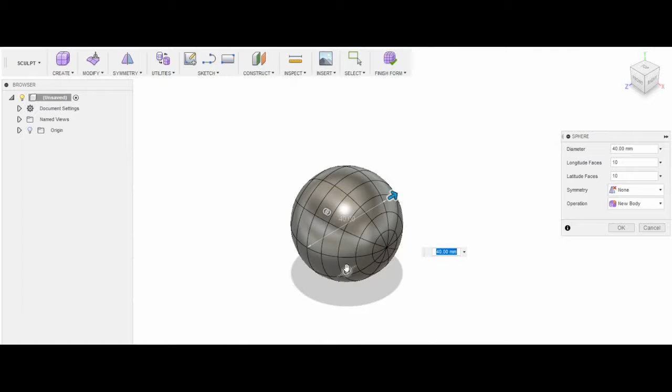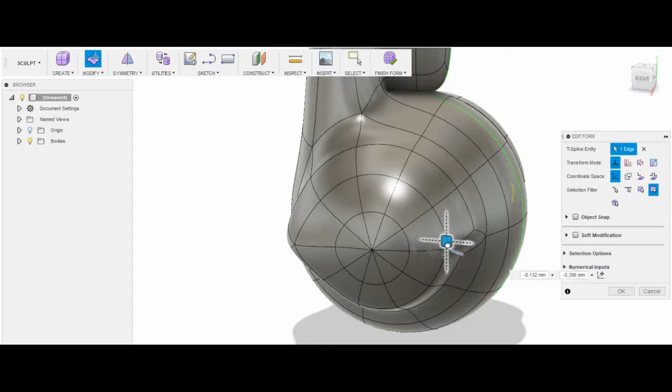This time I am drawing a chicken. The prompt was roast, and I was originally going to do a roasted chicken, but I thought it would be funny to do a cartoon chicken and put a sign around its neck to get other people to roast it, as in criticize it and make fun of it.

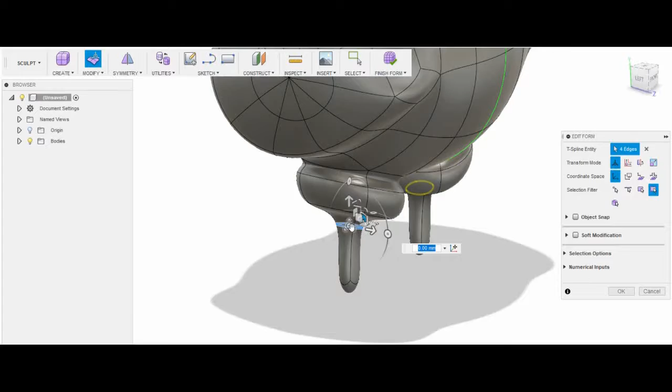I started it off simply, getting a sphere, bringing it in, and I extruded the head out originally, but I ended up changing this later on, so ignore that bit. For the wings, I selected the top half of the sphere and extruded it out using the Alt key, which is something I hadn't done in my previous videos.

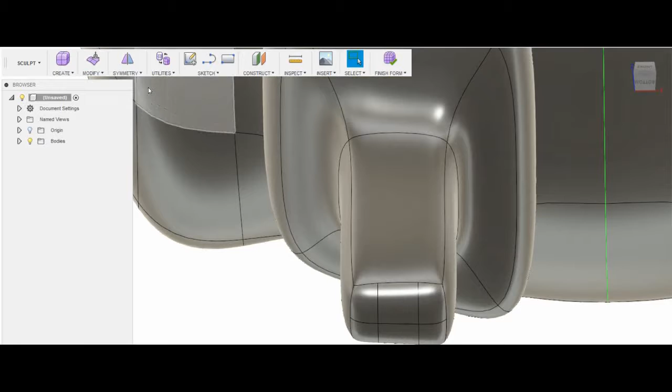It was one of the issues I was having with the sculpting environment, so I used the Alt key to extrude it out from the original sphere so it wasn't just modifying that one. Then I started working on the feet. I brought out the drumsticky bits, the thighs, and then again used the Alt key to extrude some points out of the end to use as feet.

I wanted these feet to be quite thin, but I couldn't make them too thin, otherwise the chicken wouldn't stand up straight, because eventually I'm hoping to 3D print this. So the feet had to be big enough that it looked like it could support its weight, but not so big that it looked wrong.

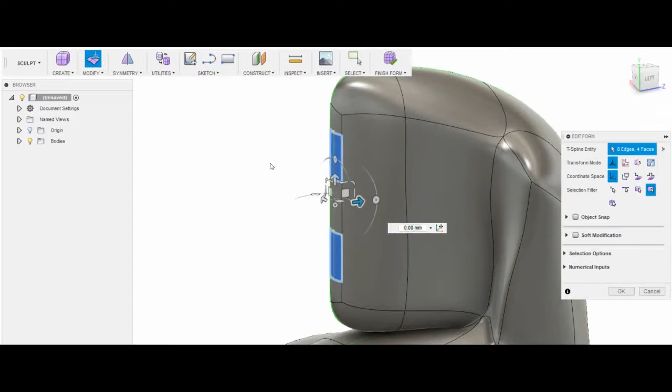I've sped up this next bit of footage to show you how I was trying to do the head, but I ended up not doing it this way in the end. I ended up deleting it, but I started out extruding, so I had quite a square head, then brought out the comb, the little red flappy bit on the back of the chicken's head. I tried to bring that out, tried doing some subdivisions, but it wasn't looking right, so I ended up deleting that and starting again with a sphere that I just attached onto the top.

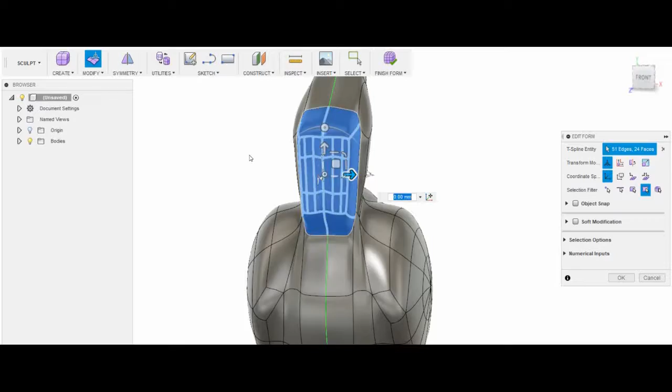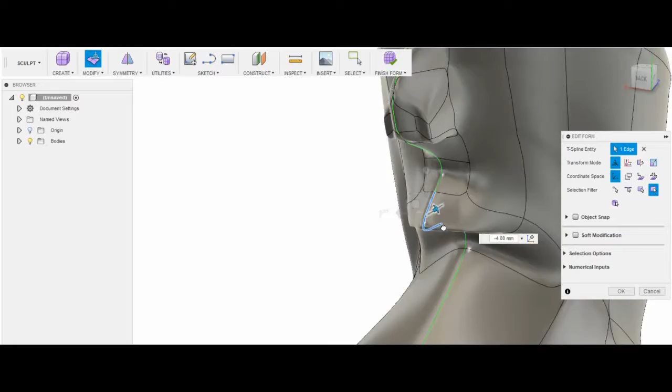So you can see here, when I was doing this head, I was trying to get it to look right, doing lots of subdivisions to try and get some detail in. It got kind of close, but it ends up looking a bit robotic, and I wanted it to look cartoony.

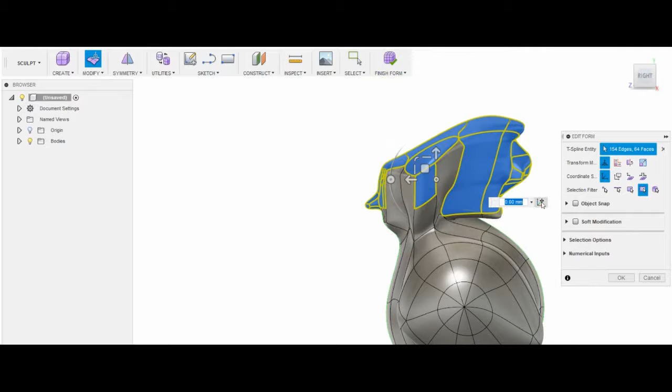So you can see I've given up on that, and I end up deleting it, then just filling in the hole where it was, which leaves me with a bit of a neck that I bring out, and then bring in a new sphere, get it to roughly the right size, and that's what I'm going to use as the head. I started modelling it off the body and then moved it into place later on.

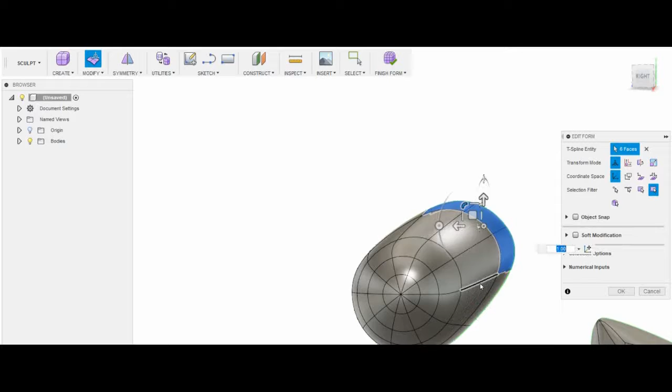So again, I'm starting on the comb on the back of the chicken's head, bringing out the full thing and then extruding the centre sections back in to make 3 bits coming out of the back of the head, and then I subdivided some of the faces on the front to make the eye sockets.

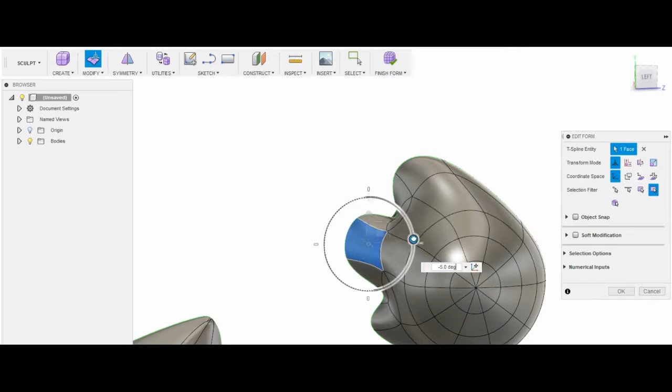I wanted the eyes to be really small and beady, because that's kind of what chickens' eyes look like. Then brought the beak out, did a couple of extrudes to try and get it the right length, and then made it so it fits with the face and isn't just poking straight out, but follows the curve of the face.

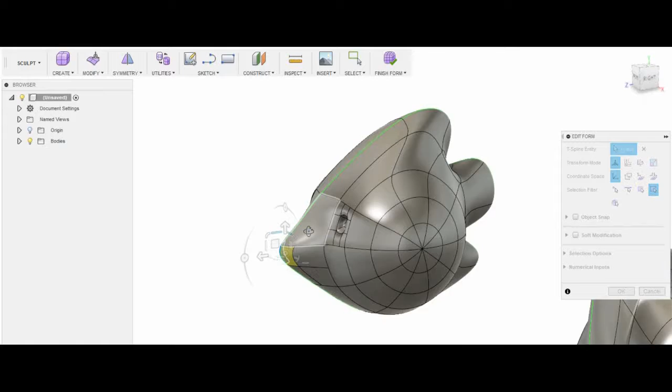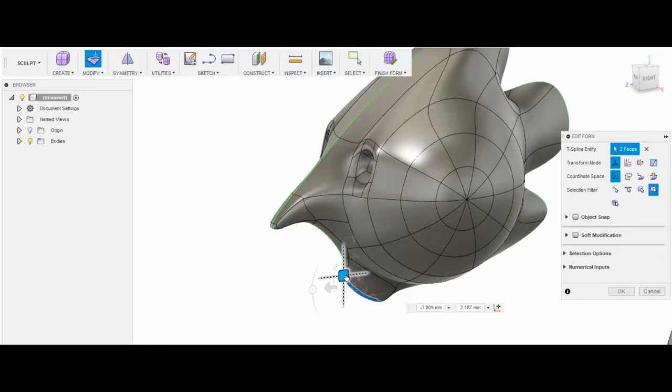And then I struggled to get the dangly bit, I think it's called the wattle, on the chicken's neck, the little red bit that looks like the comb on the back of the head. I struggled to get that to look right, and messed about with a couple of different ways. I added some new edges and tried bringing it down like that, and it ended up not quite looking right, and I think it's because I'm trying to go for the cartoony look.

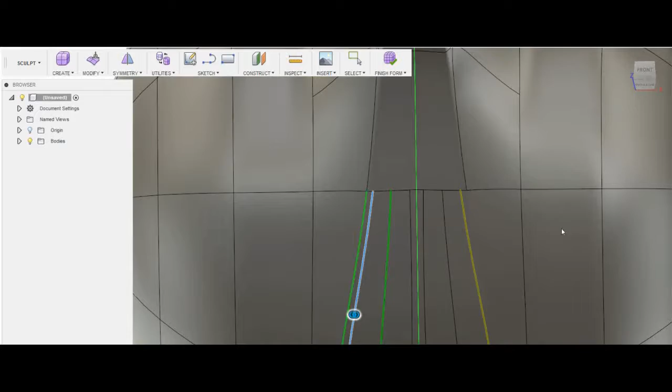I ended up just going with quite a simplified shape, because it made it look more cartoonish. Just experimenting at the minute with a couple of different ways of doing it, but I end up settling for just bringing out one face that I use as the wattle.

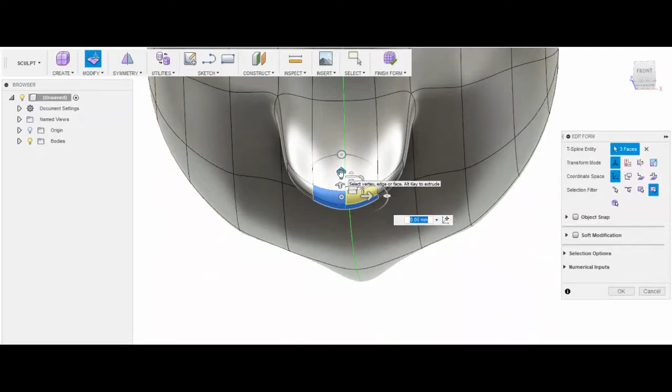So I bring out that face and then split it in half so it looked like two little bits dangling down. Then readjusted the whole head to get the scale right before moving it into place onto the neck. It was just a case of getting all the scaling on the body right and getting everything where I wanted it.

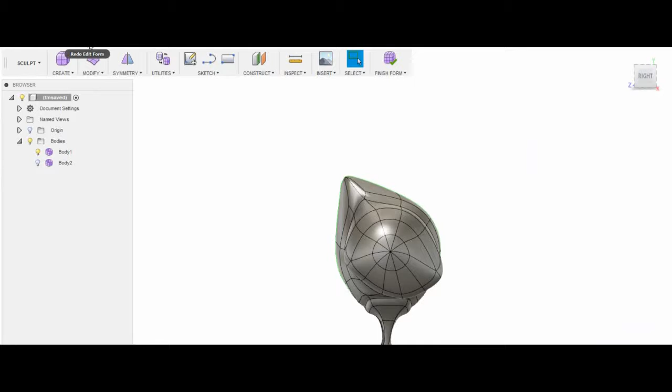Putting a couple of eyes in, just bringing in two spheres. I brought in one sphere and then mirrored it, getting them into the eye socket so that they fit right but that they're touching, so that when I come to print it, it'll print that as one whole thing.

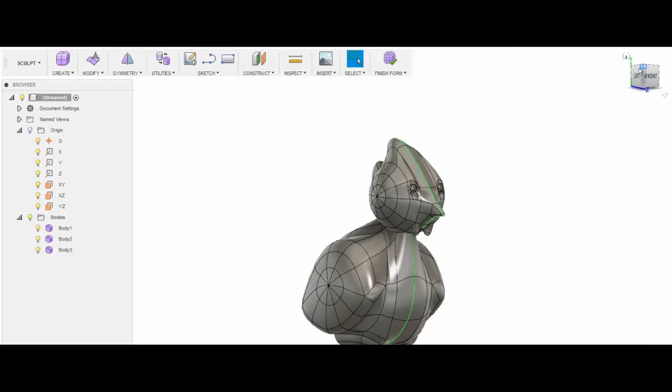Just getting the neck to look right and the back of the chicken to look more natural while still looking cartoonish. And I made the feet quite a bit bigger, just again because of the worry that it's going to topple over when I print it.

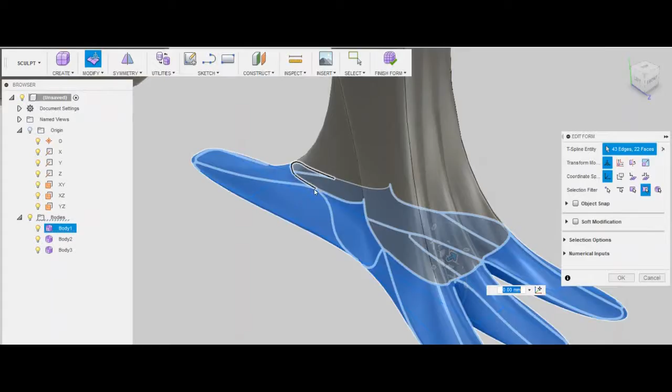I just had to make them big enough that they were going to be able to support the weight of the 3D printed model. Then I had a couple of issues where faces were overlapping on the feet, so I had to go back in and adjust them slightly so that they weren't overlapping. I actually noticed when I was doing that the feet weren't sitting flat anyway, so it wouldn't have stood up properly.

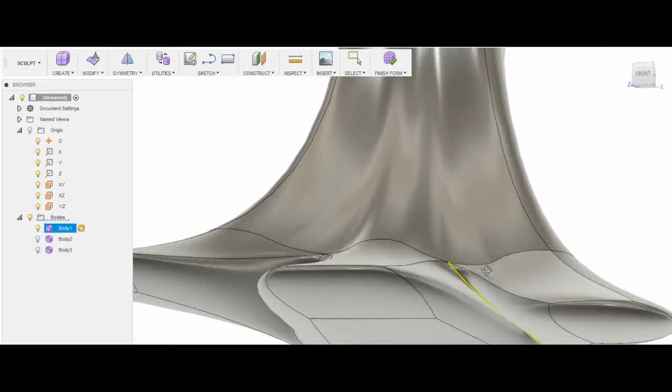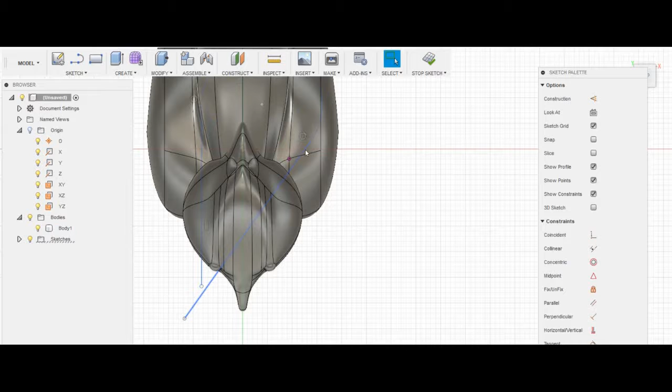But I fixed all that, finished the sculpt, and then combined all of the different bodies like the head and the back of the chicken, and then started working on the play on words of the roast. So I decided to put a rope around the chicken's neck and have a sign on the bottom which was going to be green so that people could take it into Photoshop and put their own roasts on either the chicken itself or about my skills on Fusion 360.

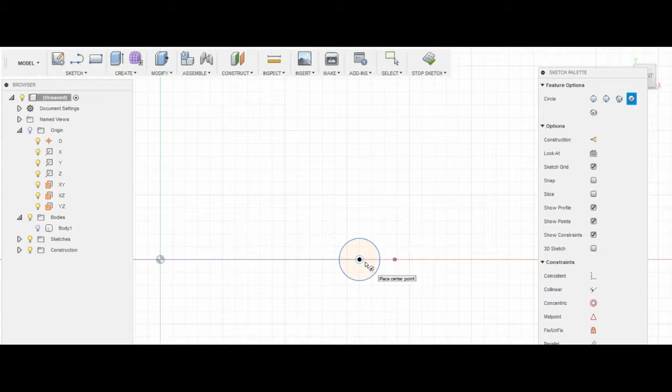The way that I did the rope was I made a path, just an arch sort of shape for it to flow around, and then created 3 circles that went onto the end of it. I used the arch as a path and used the 3 circles as the profile to follow the path, and then I could use the sweep function to sweep them around and twist it so that it looked like a braided piece of rope.

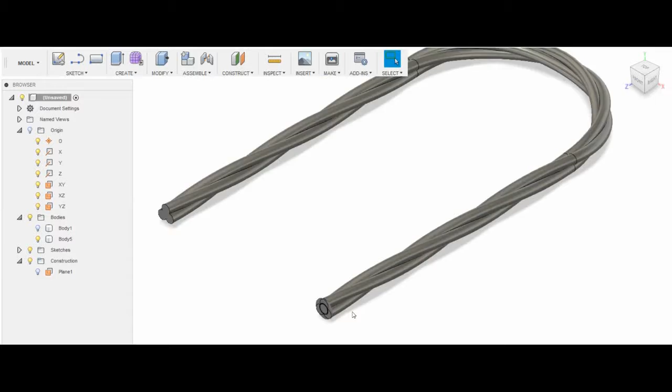It left me with this strange little disc on the end, but I end up getting rid of that later on because at the minute it's very rigid. So what I need to do is convert it to a sculpting body so that I can sculpt it and curve those edges down so that it falls onto the chicken's front.

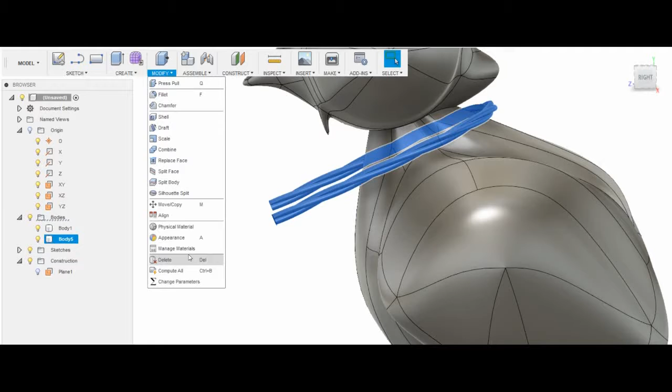You'll see here I'm converting all those tubes so that I can use them as sculpt components, then just twisting it and turning it so that it fits around the chicken. You'll see that little disc I was talking about at the end gets left as a body on its own, so I can delete that later on.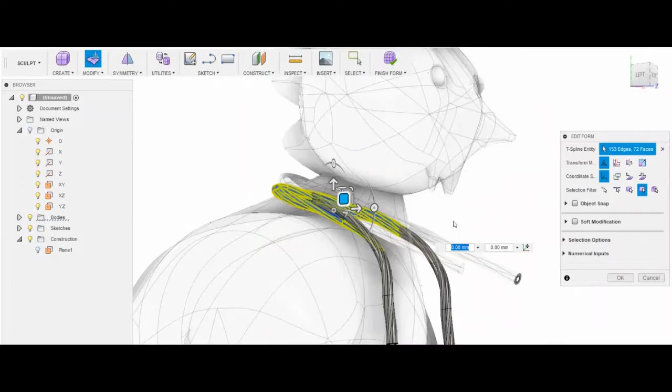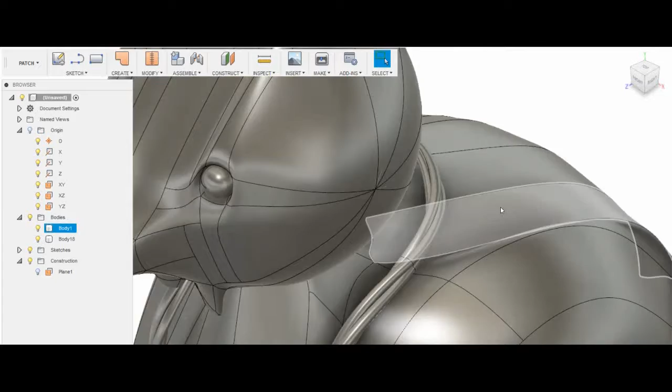Because I've converted it and it only converted the tube sections, I ended up having to go into the surface environment and just fill in the holes at the end, which is pretty easy to do on something as simple as that. And then for the sign, I just extruded a rectangle, made sure that the rectangle touched the rope, and then combined all those bodies.

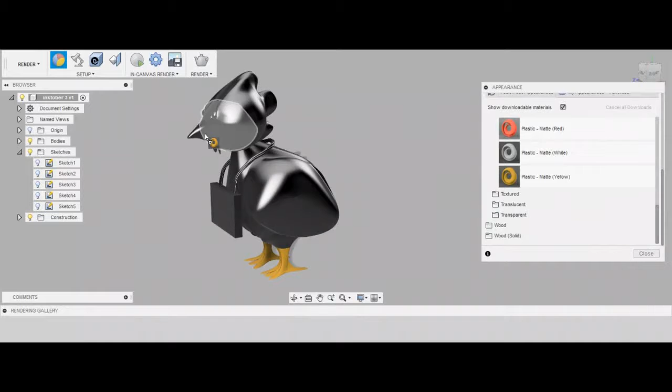I actually ended up splitting some of the bodies so that it meant I could paint just the comb and the wattle and the beak separately. I put in a surface and then split the body at the point where it touches the wattle, so that I could make that red, and I did the same with the comb and the beak, because otherwise when I tried to make those bits red it made the whole head red.

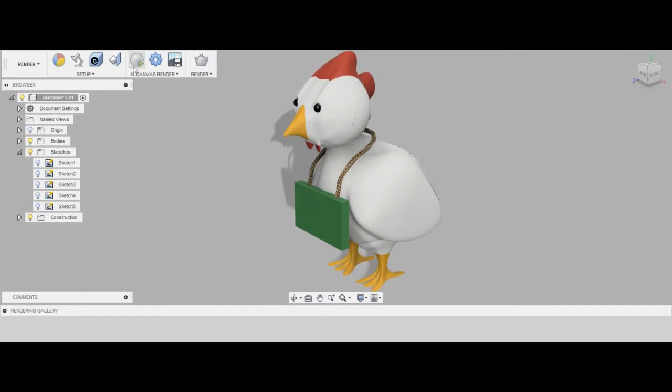When it came to rendering it, I've just rendered it in really bright plastic colours because when it gets printed they're the colours that it's going to be, and the bright solid colours make it look more cartoonish. I've made the sign green because it'll be easier to take into Photoshop or whatever photo editing software people want to use and change it around and put their own little sign around the chicken's neck to say whatever they want it to say.